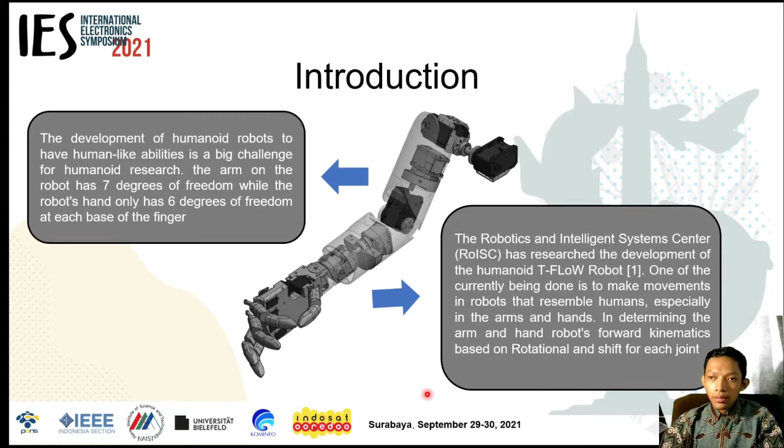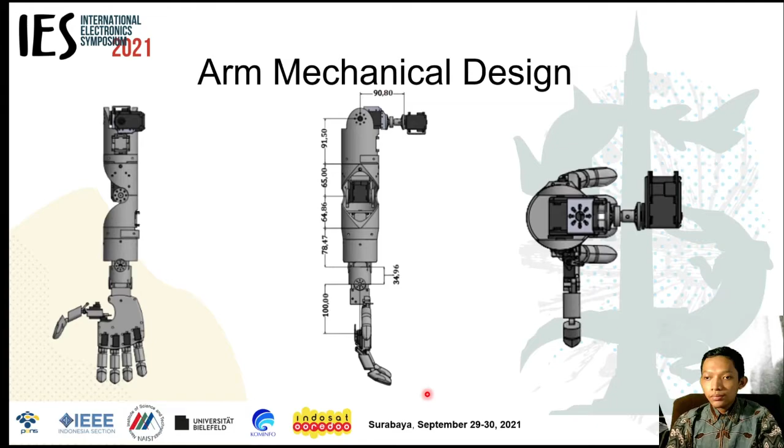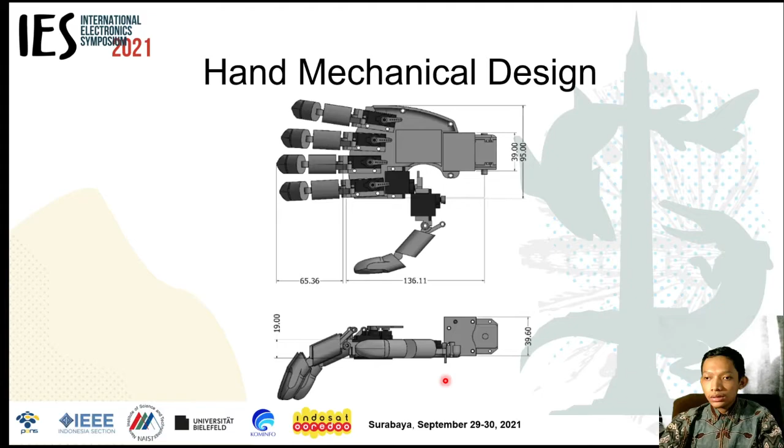And this is the mechanical design for the hand. It is the same as before, with sizes based on millimeters.

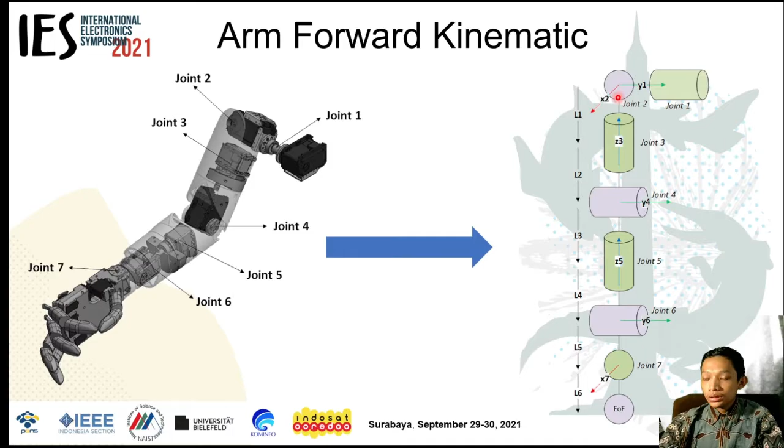For the first and second joints, this is a cross joint, so they have no shift joint or translation. Then from the second joint until the last joint, there is translation or shift for each joint, and we must divide it based on the rotation of each frame of the robot.

This is the table data for the arm forward kinematics with 7 degrees of freedom, from the first joint until the seventh or last joint.

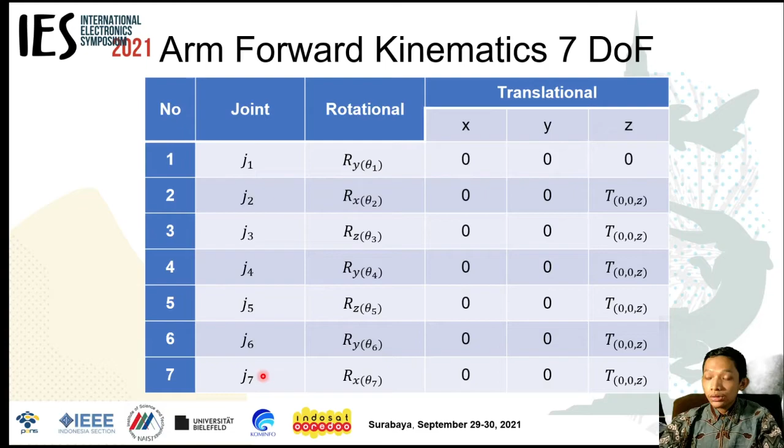Next is the hand forward kinematics. There are 6 degrees of freedom, and we must divide it into 6 joints.

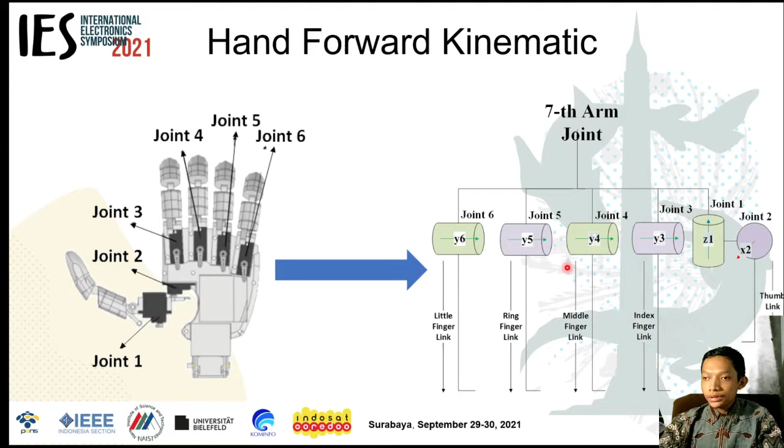For the first and second joints, this is a cross joint, so there is no translation. Then the third, fourth, fifth, and sixth joints correspond to each finger link of the robot's hand.

This is the data table for hand forward kinematics with 6 degrees of freedom, based on rotational frame and translational frame, from the base until the little finger.

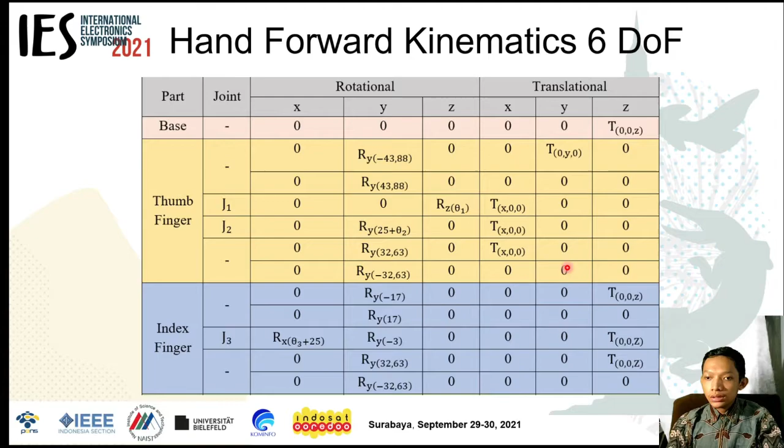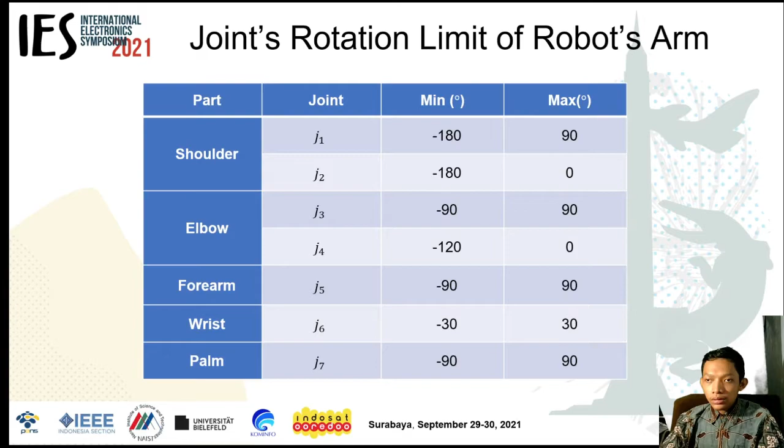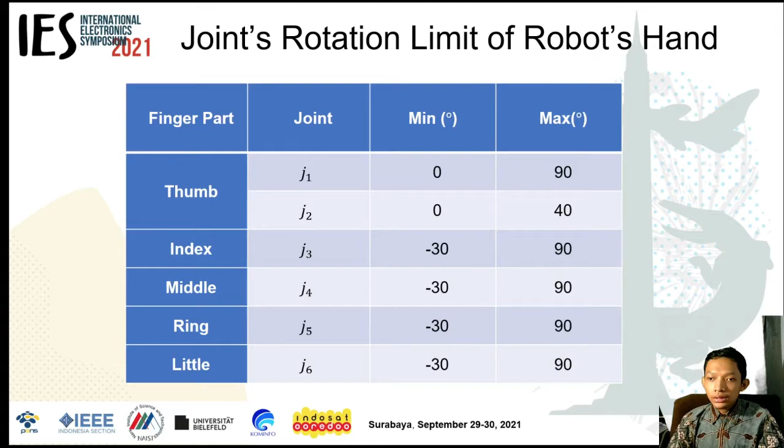Next is the joint rotation limit of the robot hands. For the finger part, the thumb has the first and second joints. The index finger has the third joint, the middle finger the fourth joint, the ring finger the fifth joint, and the little finger the last, or sixth, joint.

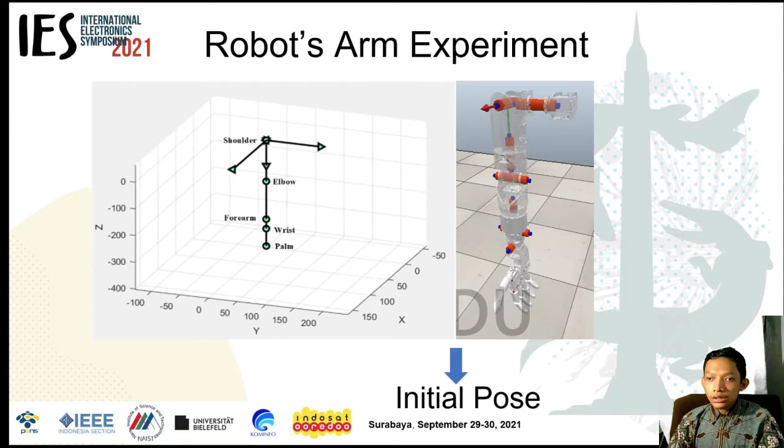This is the robot arm experiment showing the initial pose for each part of the full arm robot, and then the robot arm experiment during the grasping process, shown from its vector position.

On the left picture is the forward kinematic analysis using MATLAB to accurately check the position of each joint, and on the right picture is the simulation in CoppeliaSim.

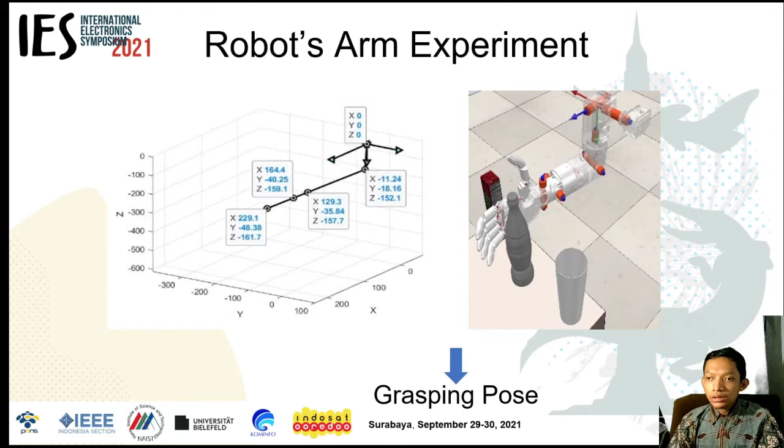This is the robotics experiment for grasping objects with dimensions from 3 centimeters up to 10 centimeters.

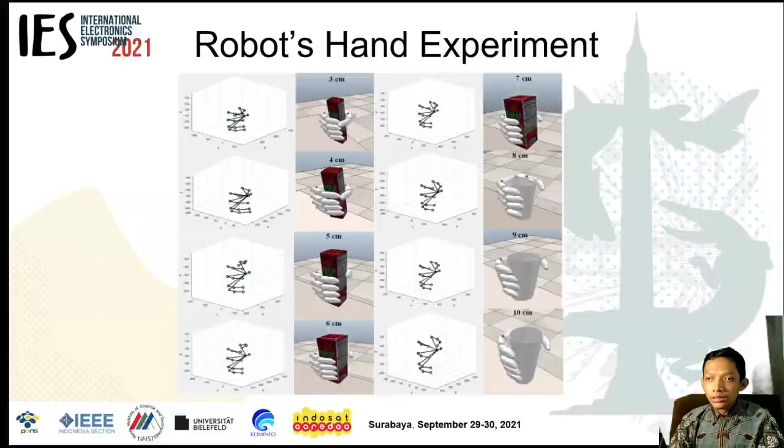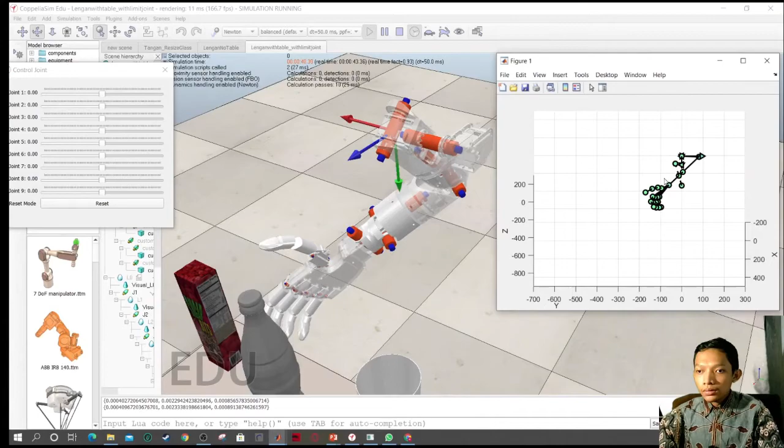Next we will show the simulation for the forward kinematics in MATLAB visualization and in Coppelia, and this is the plot diagram using the forward kinematic analysis as explained before.

This is the movement of the full arm robot using trajectory planning and inverse kinematics for controlling joint orientation. This is the process of grasping, with two trajectories for the arm, and the last one is the trajectory for the hand.

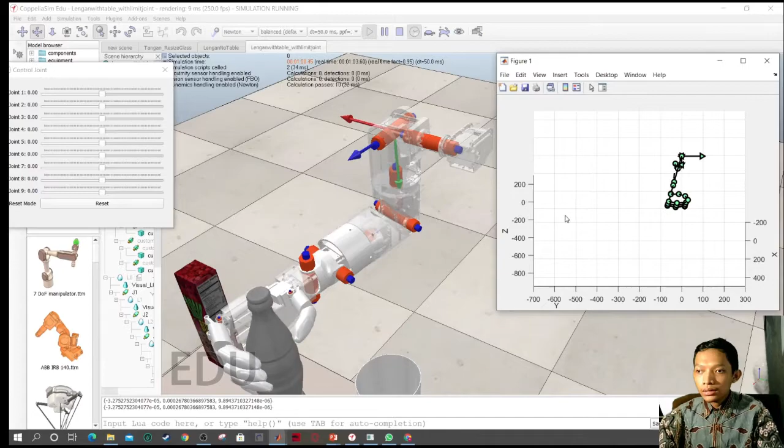This is the plot diagram of the trajectory, but now we will go back to discuss the forward kinematics.

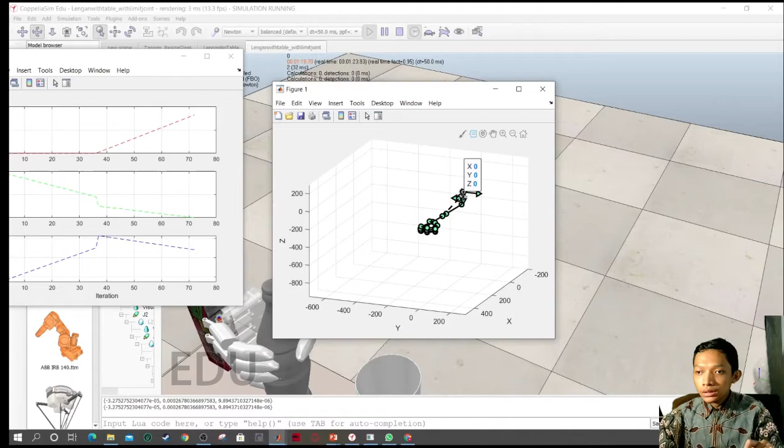The forward kinematics is used to accurately check the position of each joint: for the base, the elbow, the forearm, and the wrist.

With forward kinematics, we can check the correctness of each joint of the robot's arm before implementing it on the real full arm robot. Without forward kinematics, the robot can still move, but it becomes difficult to analyze the position of the vector. This is the schematic we used to check whether it is correct or not.

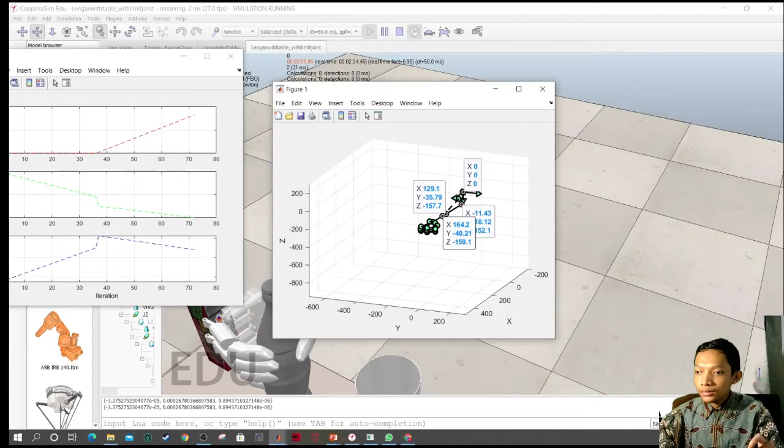For the conclusion: forward kinematics analysis only describes the vector position of each joint, or the end effector vector, from a given orientation. With forward kinematics, we can learn the mathematical model of the arm and hand of the Flow humanoid robot before performing position control with inverse kinematics.

From the experiments, it is known that the forward kinematics applied to the Flow humanoid robot's arm and hand can correctly check the position vector of each joint.